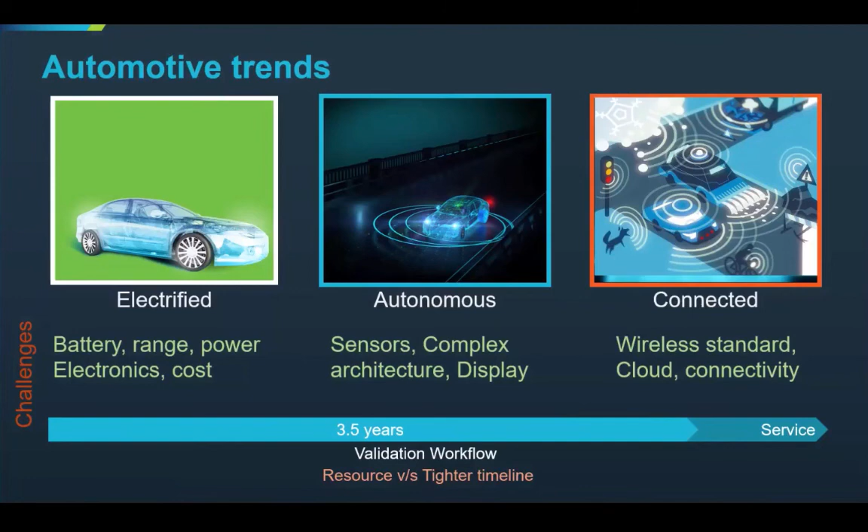So there are three main applications in the automotive world which all of us are probably dealing with. The first one is the electrified car. So in the electrified car, one of the biggest challenges teams are evaluating is how do we increase the efficiency of the battery: with a single charge, how long we can drive. The second one is the cost. How do we overall reduce the cost of the system so that the electrified car is affordable in the market and can compete with the current solution as well.

And in this area, the teams are working on evaluating various different components which will improve the power efficiency, reduce the battery size, as well as overall weight of the car. The second application is the autonomous car. This application is mainly motivated from the safety aspect. As all of us know, 95% of the car accidents are because of human error.

So we are evaluating that with the autonomous car, or a smart machine inside the car, which will either assist the driver or replace the human driver and make all those decisions related to your safety.

And that will make the driving much safer. And to achieve this functionality, or have a smart machine in the car, we need a combination of sensors. So sensors will provide a 360-degree view around the car, what are the objects around it, which will help making those decisions.

Along with those sensors, we will have a complex embedded controller, which is going to take all the sensors data and then make the smart decision, whether to apply the brake or change the lane. So all these smart decisions will be done by the smart machine inside the car.

Now, to achieve this functionality, as you can imagine, we are replacing a human driver with a smart machine. And to achieve that, it requires a very high speed controller, because in a matter of time we have to make those decisions. It is almost like replacing a brain with a machine.

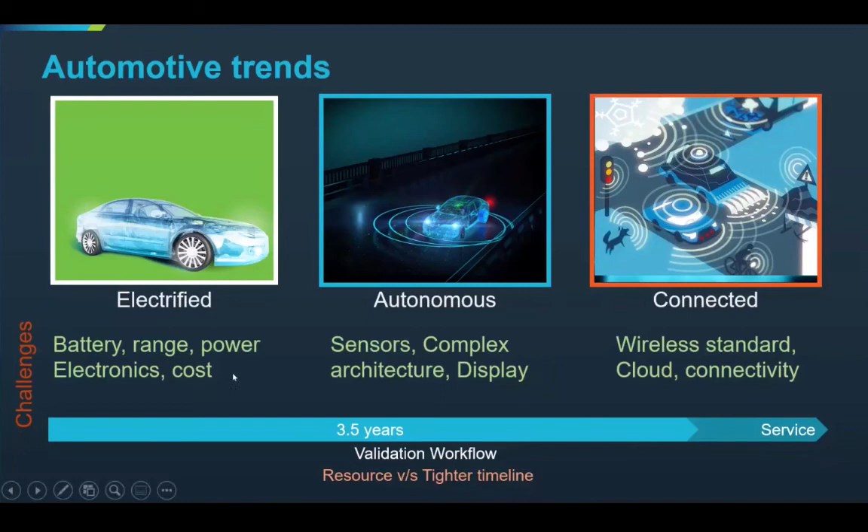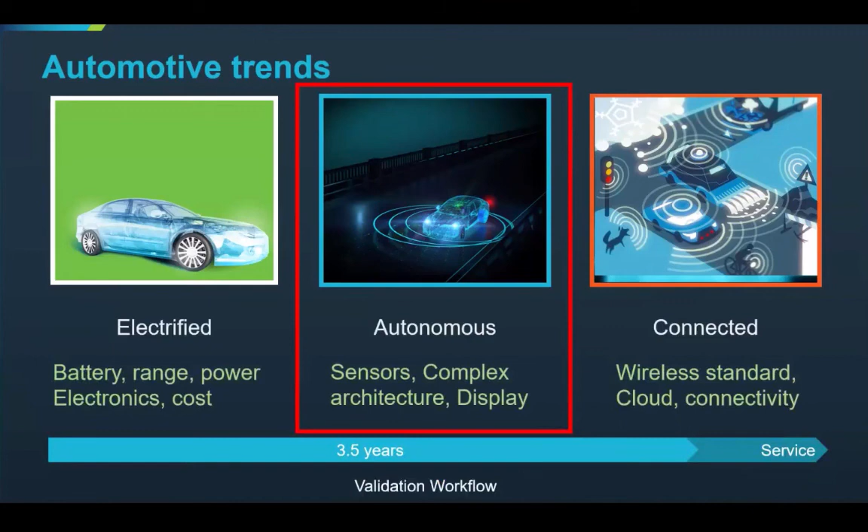In today's webinar, we are going to focus on the autonomous car. We will talk about what this autonomous car structure will look like, and what are the different standards which are evolving because of autonomous cars. So let's start with the basics. I'm sure you will be familiar with this slide.

What's the autonomous car? It is also called Advanced Driver Assistance System, in short ADAS. There are 5 levels of automation, level 1 to level 5, and depending on the level, the responsibility of the decision making will be transferred to the machine.

As you can see, in level 5, the entire decision making responsibility is with the machine. So there is no driver at all. The human driver is replaced completely by a machine. So all the critical decisions will be taken by this smart machine.

Now, as we move from level 1 to level 5, the machine becomes smarter and smarter, and we need a higher speed controller and more sensors to meet that complexity. For level 1 and level 2, we can have a simpler architecture, but as you move to level 3 to level 5, the architecture becomes more and more complex. And we'll talk about what complexity we may have as we go to level 3 to level 5.

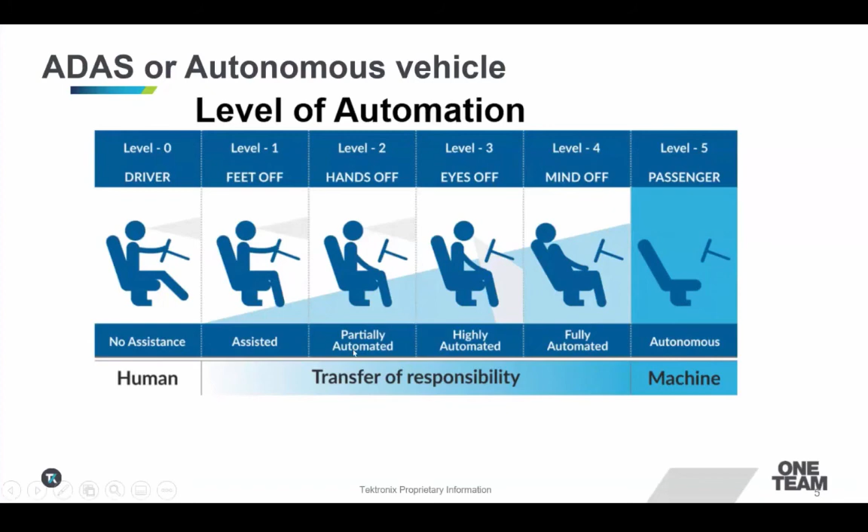So this is the architecture block diagram of the autonomous car. There are 3 main blocks in this architecture. There's a sensor block, which is automotive radar, camera, and LiDAR sensors. Then there is a controller and then actuator.

So the way it works is that there are three different kinds of sensors used: radar, camera, and LiDAR. And depending on which level of automation we are trying to achieve, the number of sensors will increase. Like level 5 may have 10 to 16 cameras, and a similar number of radar and LiDAR sensors. So all these sensors are looking at a 360-degree view and giving information to the controller about what objects are nearby.

You can imagine that any of the camera or radar sensors are operating at very high speed. And to transfer the data from the sensor to the controller, we obviously need high-speed in-vehicle network standards to send this raw data to the controller. The second one is a controller which is doing the data crunching and the decision making. So again, you can imagine that 16 camera sensors are sending data simultaneously to this controller, and then it has to make the decision in a very short time, like 4 microseconds or even less than that. So we need faster, complex embedded hardware to meet these requirements.

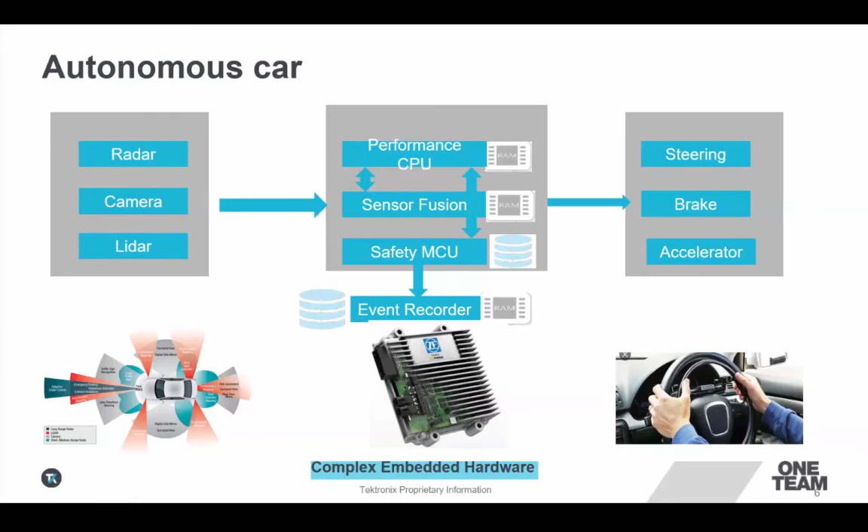So that architecture has its own advantages and disadvantages. The disadvantage is that all sensors are making their own independent decisions. They don't know the data from other sensors. So it is not a collective decision. It is an individual sensor's decision. For level 3 to level 5, that architecture may not work. So the other two architectures under consideration are central computing and the zone architecture.

The most popular one is the zone architecture, where we will have probably 3 or 4 different zones, and each zone will be doing data processing from its individual sensors, and then they would be talking to each other through a high-speed network standard to communicate what data they have received from sensors and what decision they should make. So there could be 3 to 4 different zones. This is also called a domain controller. This is one architecture which is very popular. There are a few OEMs who have already announced that they would be using a zonal or domain controller architecture.

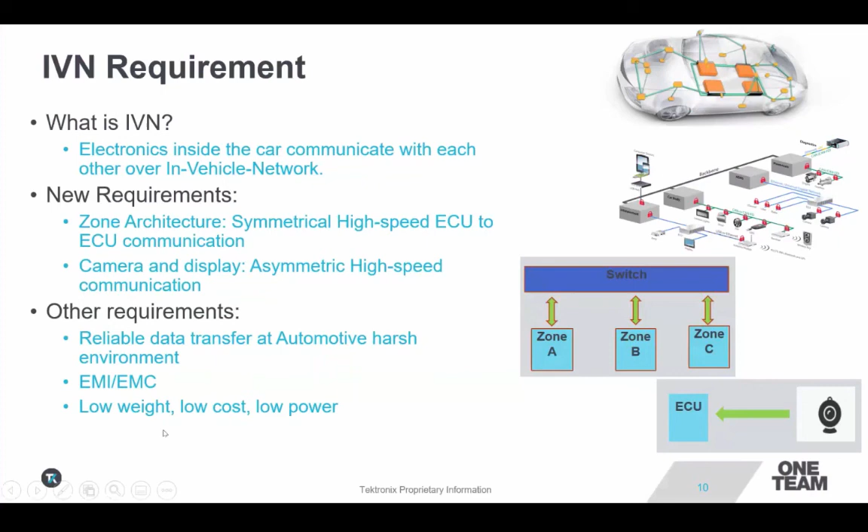Let's look at some of the new in-vehicle network standards which are evolving. I'll start with the symmetric in-vehicle network standard, where it offers full uplink and downlink speed. In that, Automotive Ethernet is one of the fastest growing standards. Currently IEEE is defining this particular specification along with Open Alliance. So we have already 100BASE-T1, which is 100 Mbps, 1 Gbps Automotive Ethernet standard, and multi-gigabit Ethernet, which is 10 Gbps.

This is the latest edition from the IEEE. It is an approved specification which was released by IEEE this year. So these are the three standards which are already approved from IEEE. And then IEEE is working on next generation 25 and 50 gig automotive Ethernet also for ECU to ECU communication.

In the asymmetric IVN standard, there are various LVDS standards available like FPD-Link, GMSL, and all of them are like proprietary standards. There are a few standards bodies also working on defining asymmetric IVN standards, like MIPI Alliance is working on MIPI A-PHY. There's a standard called HDBaseT, and the latest one is ASA. So these all standards are likely to be used for the display and the cameras as well. Even multi-gigabit Ethernet has a version where it can operate in a half duplex mode, which can be used also for the display and the camera.

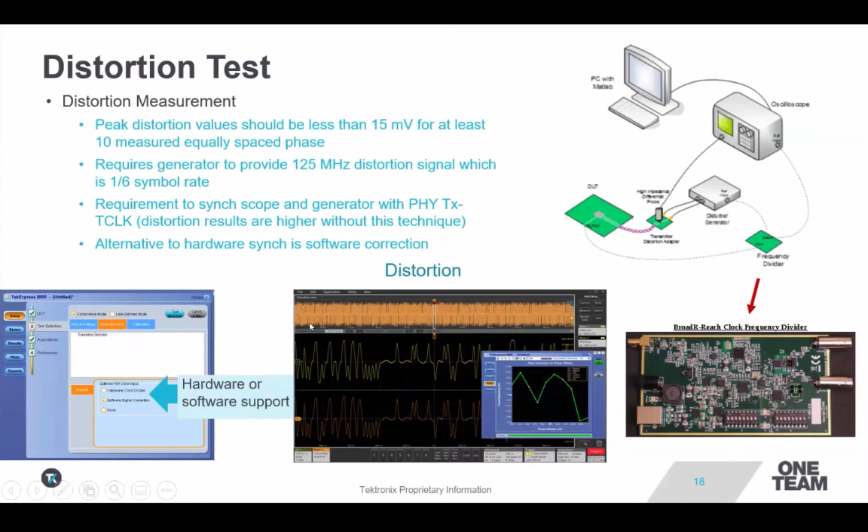The next three measurements we are going to talk about are more frequency domain measurements, where we need a spectrum analyzer or a vector network analyzer kind of instrument. But Tektronix offers these measurements using the oscilloscope itself. So the first measurement in that category is power spectral density, where we have to plot the RF spectrum to calculate the power spectral density. And we use the oscilloscope FFT method to perform this measurement.

Our oscilloscope offers the lowest noise floor with a 12-bit ADC, so that you can perform this measurement and get pretty much correlated results with the spectrum analyzer. We have done correlation with the spectrum analyzer, and it matches the performance of the spectrum analyzer. So we are able to perform the power spectral density measurement using the oscilloscope itself.

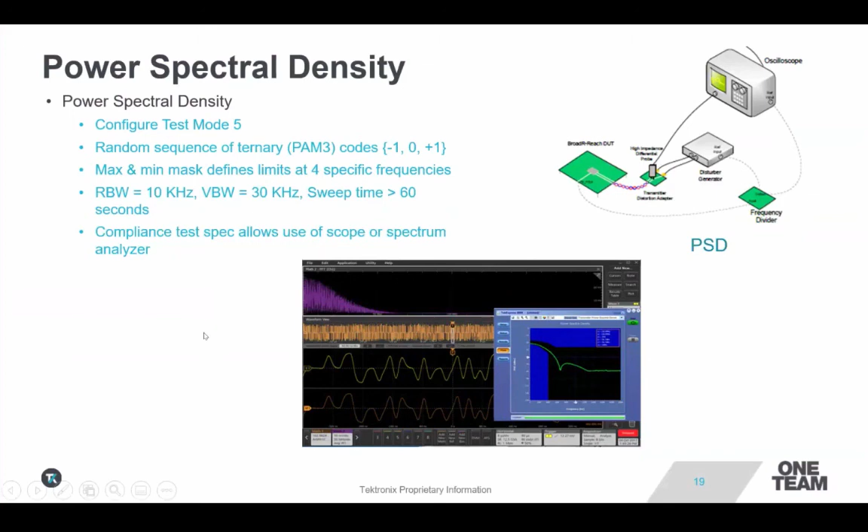The second measurement we have is the return loss measurement. Whenever you think of return loss, obviously the choice is a vector network analyzer. But Tektronix has a patented technique by which we perform even the return loss measurement using an oscilloscope and a function generator. And we have used this technique for traditional Ethernet for more than 10 years. We have done correlation with the network analyzer as well, so it correlates the result.

The reason this method is applicable for automotive Ethernet is that if you see the spec limits, they are not asking for minus 80 dB loss or those kinds of measurements. Those are in the range of minus 20 to minus 30. That's the reason even the oscilloscope-based method is able to measure this return loss for automotive Ethernet. And our performance is very similar to a vector network analyzer. Here the advantage for you is that a single instrument can be used for the time domain measurements as well as some of the frequency domain measurements.

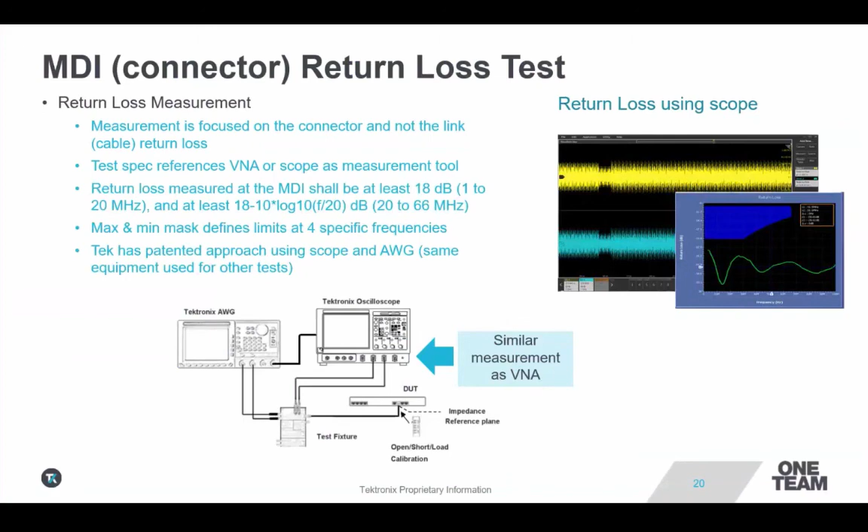Another measurement we have is the common mode emission test. Again, as per the Open Alliance procedure, you can use either an oscilloscope or a spectrum analyzer for this measurement. We use the oscilloscope method to perform this common mode emission test. This specification has a very tight margin, like 25 microvolts up to 75 megahertz, and it is very sensitive to noise from nearby instruments, a monitor, or even a mobile. But we are able to perform this measurement using the oscilloscope and accurately measure the common mode emission.

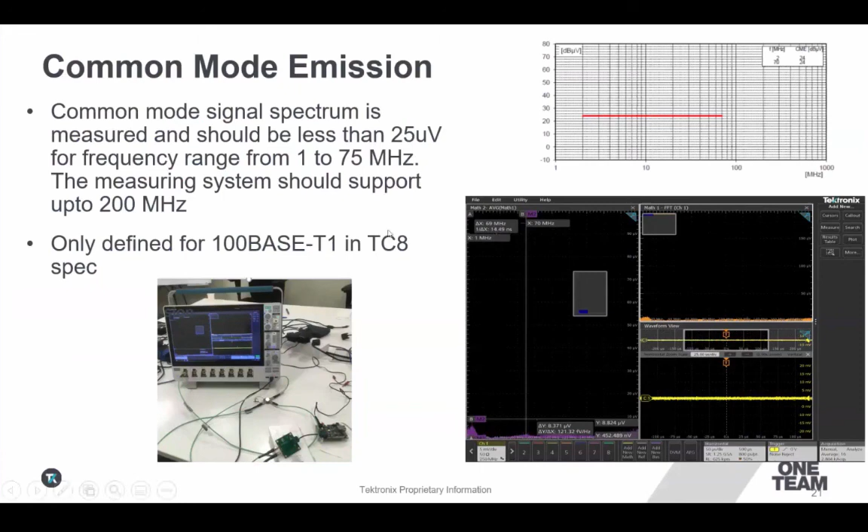So these are the three measurements where it is a frequency domain measurement, but we are still using an oscilloscope to perform it. Let's look at the solution. So what solution do we have? There are three different aspects of the solution. The first one starts with the fixture, the second one is a probe, and the third one is the oscilloscope along with

the automation software. We have TekExpress-based automation software by which we can automate all the measurements for automotive Ethernet and perform compliance for 10BASE-T1S, 100BASE-T1, as well as 1000BASE-T1. This solution is supported on the 5 and 6 Series MSO, which are the latest oscilloscopes, as well as performance oscilloscopes like the DX and SX series platforms.

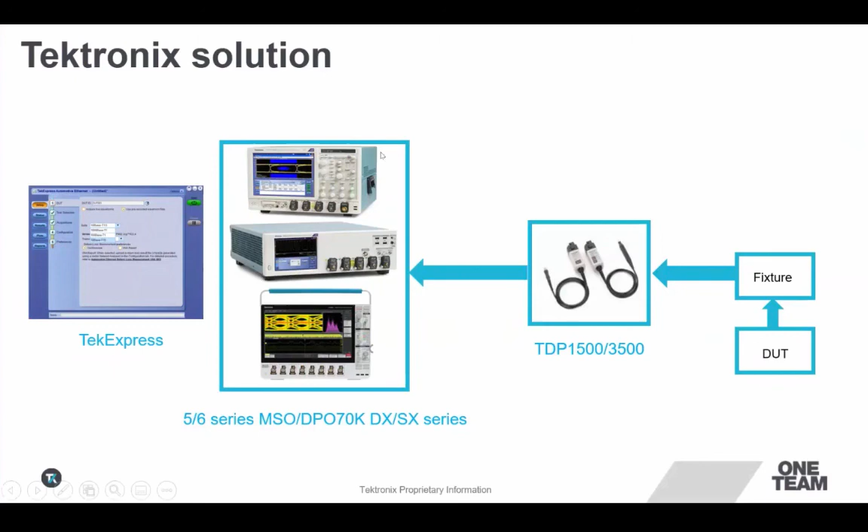So let's talk more about the TekExpress based solution. So it's a wizard based solution. Here the biggest advantage is that you don't have to read the documents from IEEE or from the Open Alliance. This configures the entire test based on the automation platform.

So in a single TekExpress software, we have 10BASE-T1S, 100BASE-T1, as well as 1000BASE-T1. Once you select the specific test suite, you can configure the test selection. So we have all the tests as per the Open Alliance as well as IEEE specification. This application can run either in the compliance mode or the user-defined mode.

So in the compliance mode, it configures the parameters of the oscilloscope or a function generator completely as per the Open Alliance procedure definition. In the user-defined mode, as an advanced user, you can change most of the parameters to perform the test beyond compliance.

One of the biggest advantages you get with this solution is that every time you run this measurement, the waveform, the oscilloscope setting, as well as the report, everything is saved into the hard drive as a session file. So in case you find a failure, you can recall those session files, which will include the waveform, and you can perform the debug. We offer DPOJET debug tools as well to perform root cause analysis of why certain tests failed. You can share this session file with your counterpart team to run this in an offline mode and perform the analysis of why something failed.

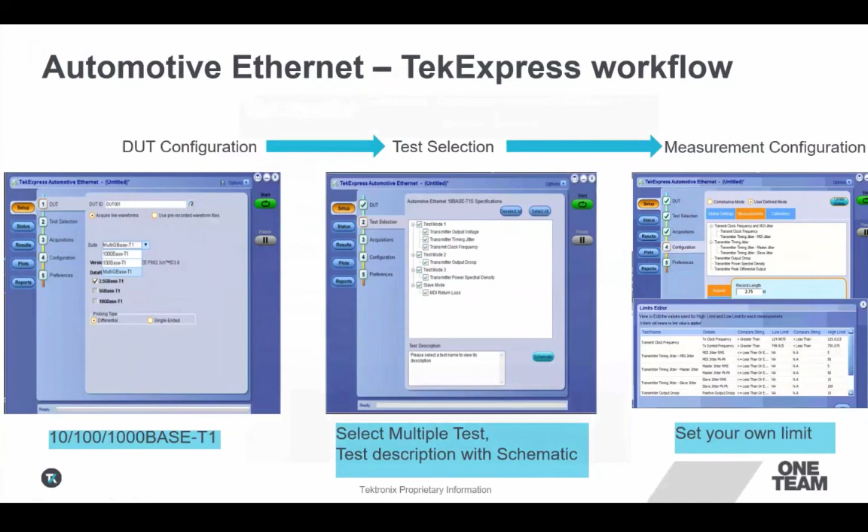Once the measurement is completed, it gives you a nice report along with the pass-fail criteria, whether the test is within the limit. It also gives you a screenshot of how this measurement was performed and what region of the waveform this measurement was performed on. So all these parameters will be available, which can be shared with your counterpart team.

So let's move to the next one, which is the eye diagram test. We mentioned the system level test requirements, that we need to perform a noise test: when you integrate two ECUs, how these two ECUs are communicating with each other, and if you add noise, is there a performance deterioration? So to perform this measurement, first thing is, why do we need an eye diagram test? Is it defined in the Open Alliance or IEEE? Yes, the noise test is defined in the Open Alliance, that you need to add noise and perform the signal quality test at the receiver.

And as you have seen in many of the high-speed standards, like PCI Express or USB, one of the critical measurements is the eye diagram, because the eye diagram gives you the overall health of the link, how this link is performing in various conditions, like noise, a change in temperature, or a change in voltage. The eye diagram gives you a good view of the overall link.

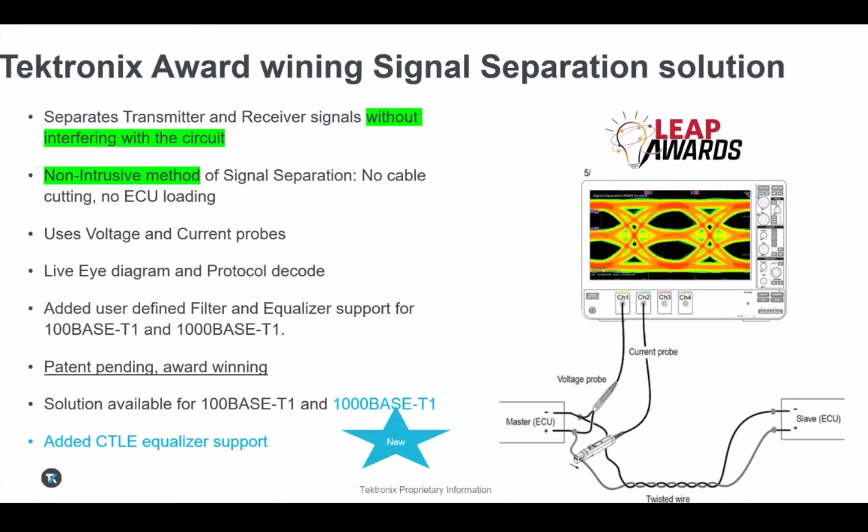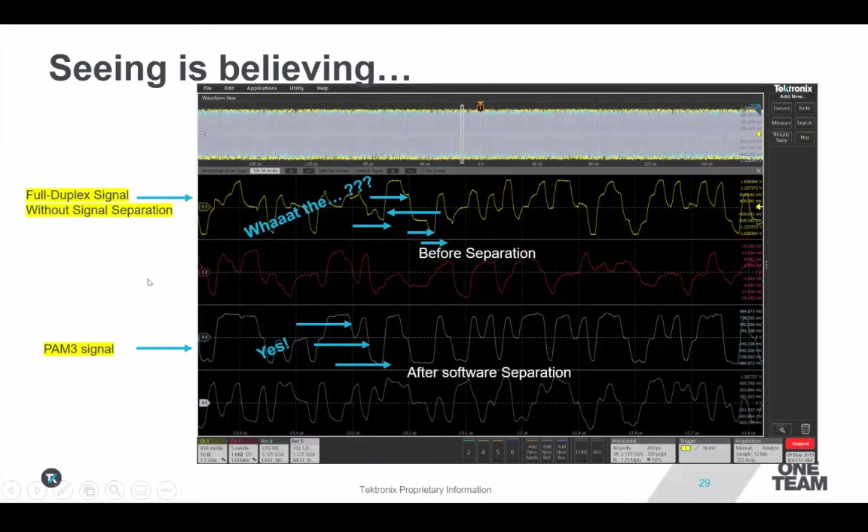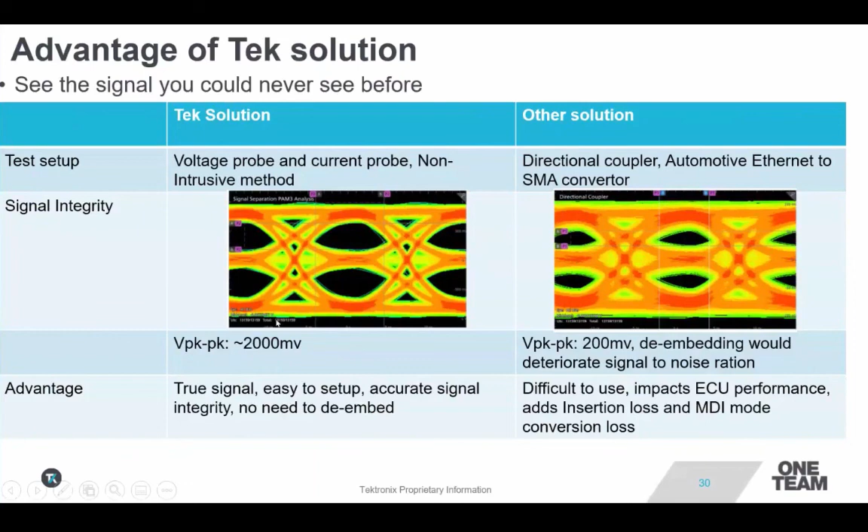And the most important, it is very easy to set up. You don't have to cut any cable, or you don't have to add new hardware in between to perform this signal separation. And this waveform can be used for doing signal integrity analysis as well as protocol decode.

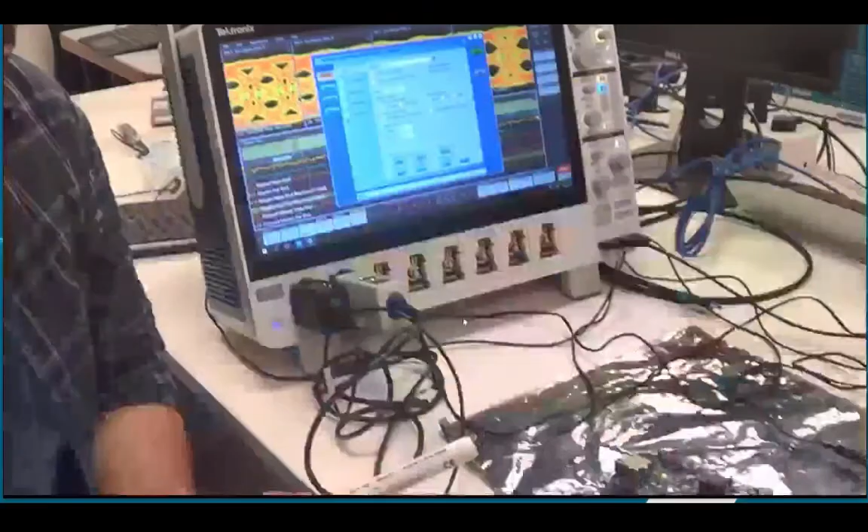Let's look at a short demo of this feature. I'm going to do a voiceover. I've just recorded this video showing a live demo of this one. So we have the two Marvell DUTs here, which are configured as a full duplex signal.

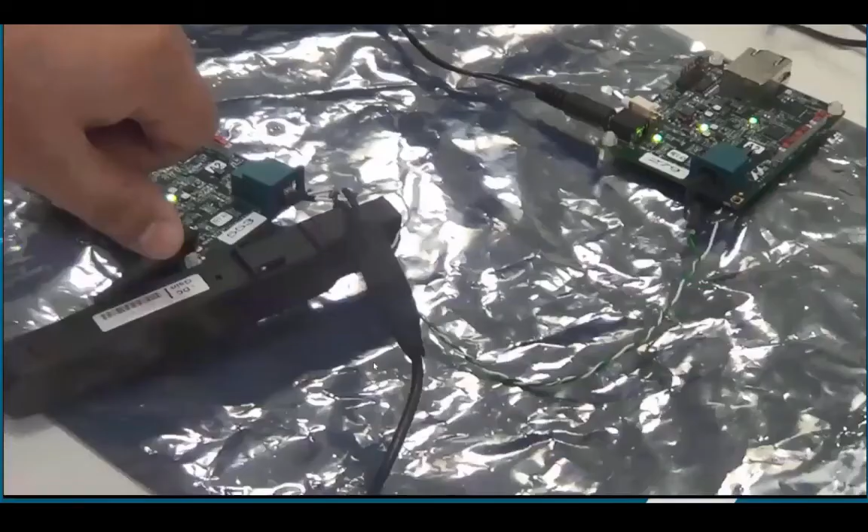One of them is acting as a master, another one is configured as a slave. And then we have connected a twisted pair of cable between them, a short cable for this. Obviously, we can use the same demonstration for the longer cable as well, and it works. And we have connected the TCP0030 current probe and TDP1500 voltage probe, one as a differential signal and one as single-ended. And the direction of the current is from the positive side, from master to the slave. That's how we have connected, and we have connected the voltage probe also differentially.

So now let's look at the application. So we have this TekExpress application again for the signal separation. It can be done as a 100BASE-T1 or 1000BASE-T1. In this demonstration, we will add an equalizer also to show you how it removes the ringing effect. So we have a 3-tap CTLE filter and created that filter. And now we are going to press validate to perform the signal separation.

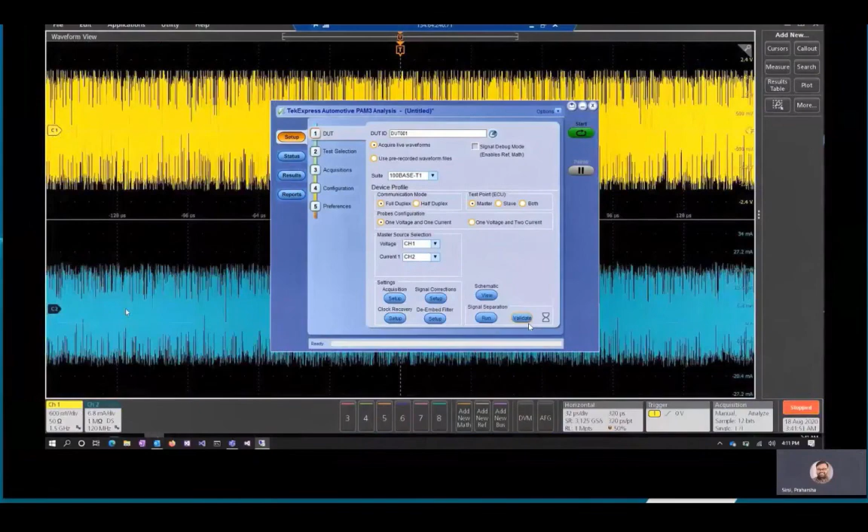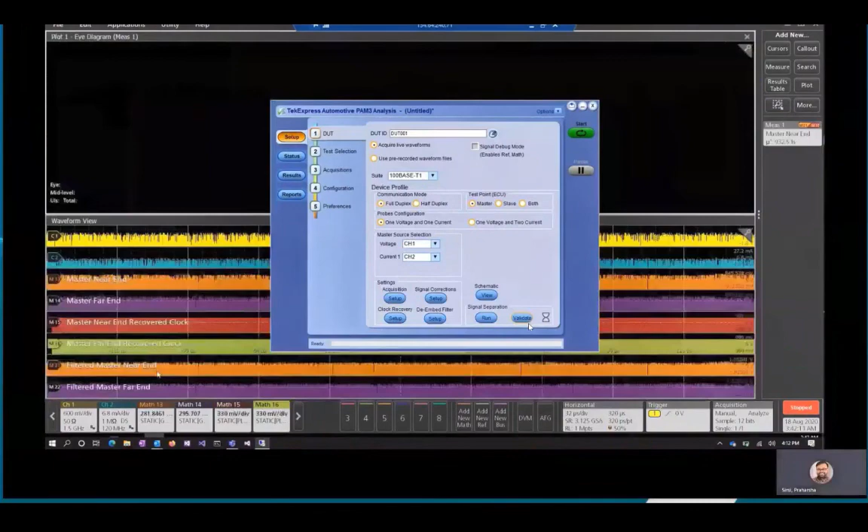So now it will acquire live waveform. On channel 1 we have the voltage waveform, and on channel 2 we have the current waveform. So it will acquire both waveforms and now perform a signal separation on this. So again, we are using a patented technique to separate the transmitter and the receiver signal. It is applying the filter as well, and then doing a clock recovery. And based on these waveforms, it will plot an eye diagram for both transmitter as well as the receiver.

So here the left hand side is the transmitter, and the right hand side is the receiver eye diagram. So you can see some ringing effect on the other eye diagram, just to show you the difference before equalizer and after equalizer. So let me pull in the waveform without filter so that we have the comparison of both. So this is the eye diagram before applying the CTLE filter, and we'll do it for the near end as well. So this shows how easily we can capture the signal using this setup and then perform the signal separation as well as eye diagram.

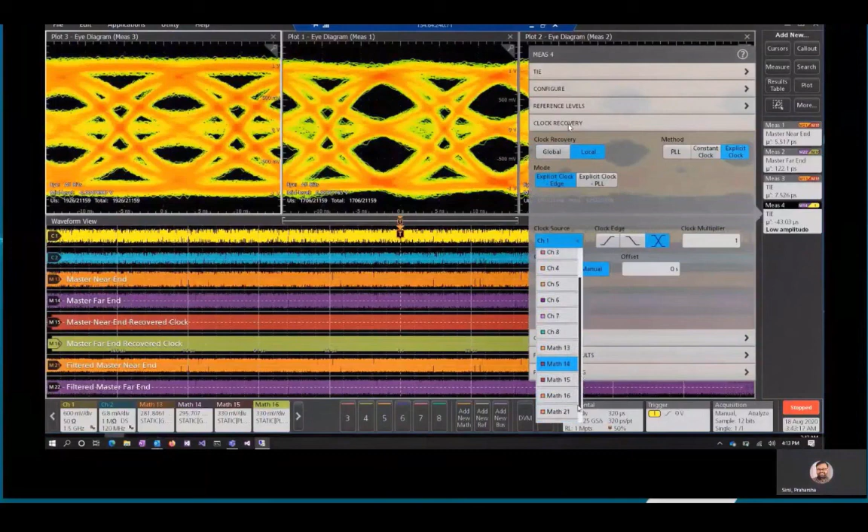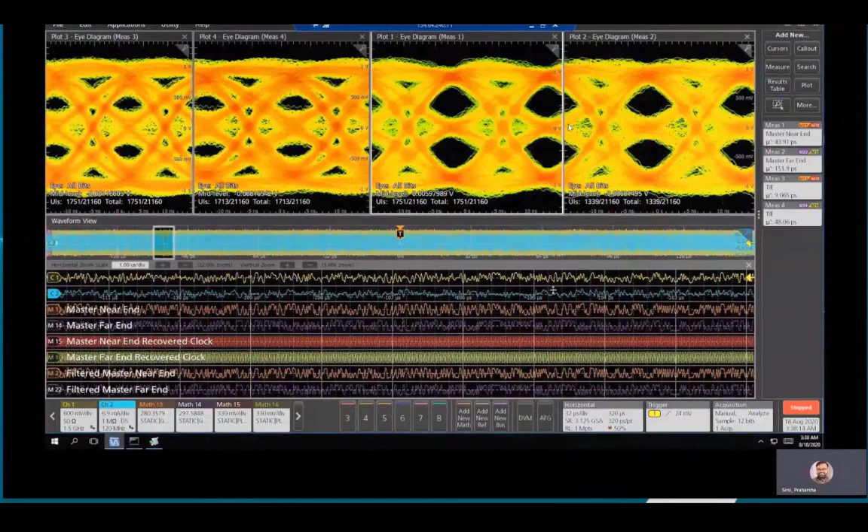This eye diagram can be used to see, if you add noise, how the eye diagram looks. It calculates the bit error rate as well, with the given eye diagram, what could be the bit error rate at the receiver end. So you can extrapolate this information to look at what could be the bit error rate. This eye diagram can run in a continuous mode as well. So you can run continuously now, and it will keep acquiring the waveform and plot an eye diagram. And for every eye diagram, it will give you the bit error rate. So you can see it runs in the live mode also and keeps capturing the eye diagram. So that was a quick demo of the signal separation technique.

Now let's move to the other use case, which is the timing measurement. So as we are moving to the automotive Ethernet world, we will have gateways, and the gateways are basically communicating with the existing low speed CAN FD network and converting into automotive Ethernet. So one of the test requirements is the latency: when you send data from CAN, how much time it takes to reach the final node. So that's a latency measurement.

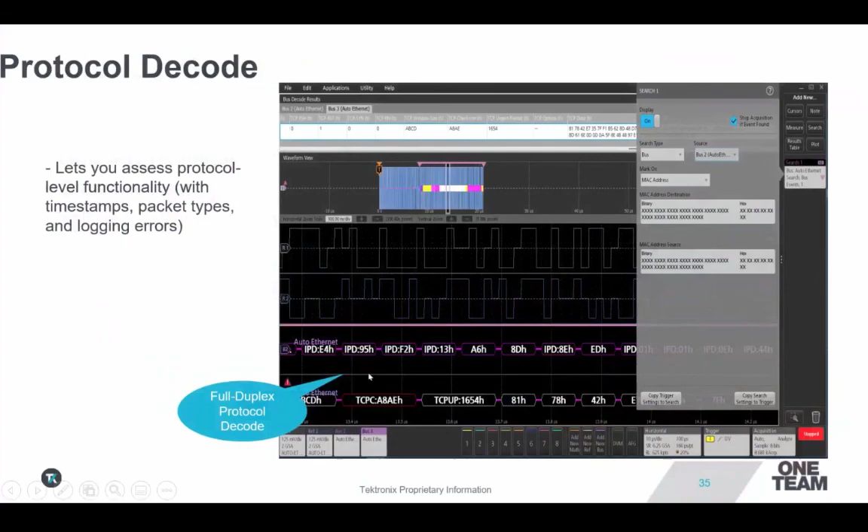The other one could be that for automotive Ethernet, we have the MII interface, or media independent interface, which converts the MCU data into automotive Ethernet. So what's the latency of MII to automotive Ethernet? For such measurement also we can use this signal separation technique. So in the demonstration, we've used an Intrepid CS box as a gateway, and we are simulating a scenario where we are sending CAN traffic on one node, then it is converted into automotive Ethernet, and we are calculating the overall latency of that. So again, we are using the signal separation technique to perform this demonstration. So let's look at a quick demo of that as well.

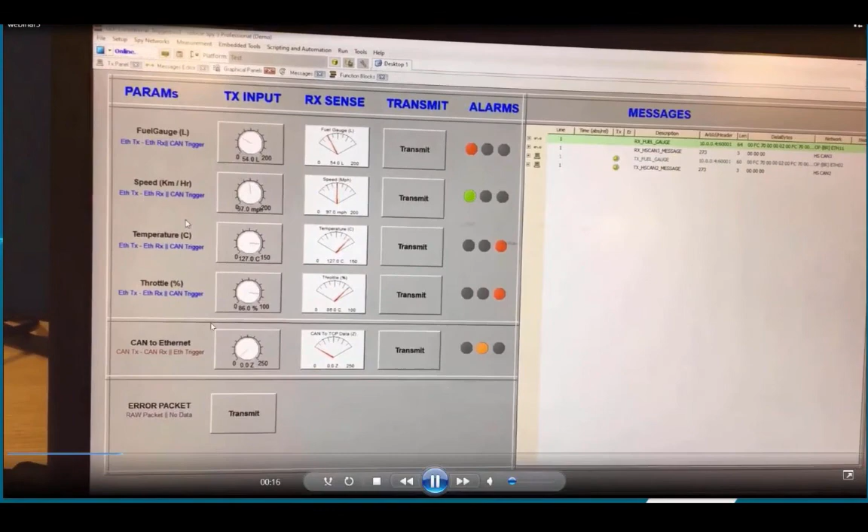So here we have the RAD-Galaxy box, and this is the Vehicle Spy UI. In that we have programmed multiple CAN sensors like speed sensors and temperature sensors, and then we are using a functionality of Vehicle Spy which converts CAN to Ethernet, or CAN to TCP.

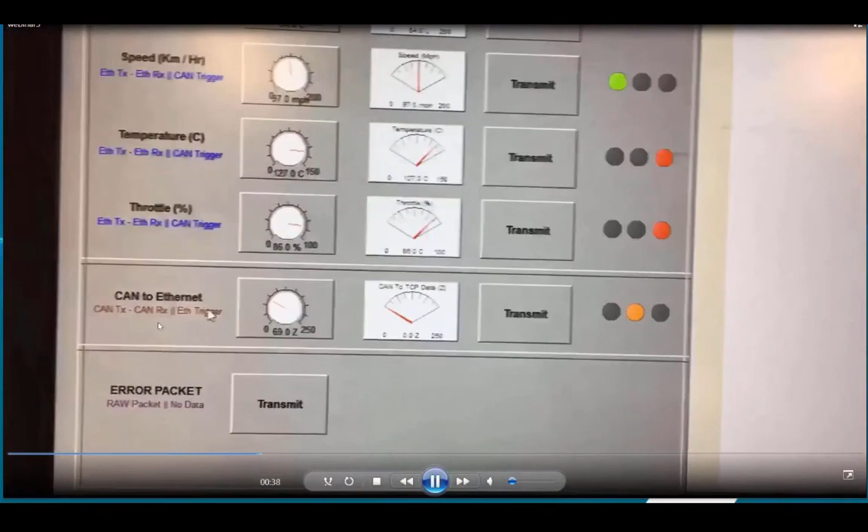So that's the functionality we are using to show this demonstration. So when you say transmit, it is going to send this CAN traffic into the automotive Ethernet. So once you click on that, we are sending a data called 70 from the speed sensor onto the automotive Ethernet. So we have sent the data, and as you can see, we have sent 70 here as a data from CAN to automotive Ethernet.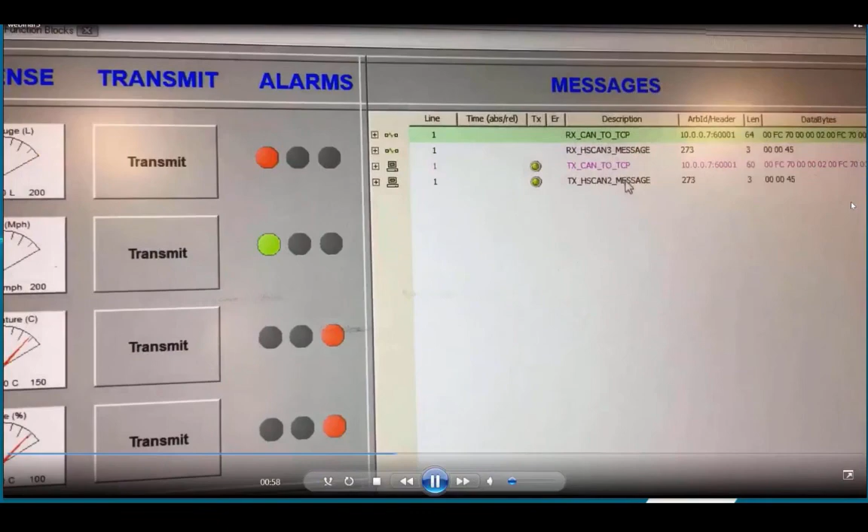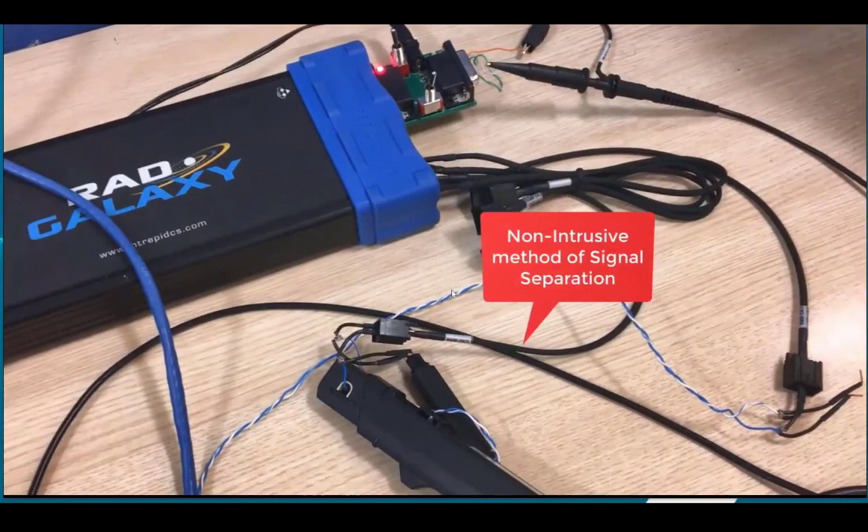If you see the hardware connection, we are using this RAD Galaxy box, and on one side we have connected on the CAN port to sense the CAN traffic. And then with respect to the CAN, we are probing on the automotive Ethernet as well. As you can see here, again, we are using a combination of voltage probe and a current probe to sense the automotive Ethernet traffic as well. So we're using this non-intrusive method of signal separation.

Now let's look at the oscilloscope. So we are triggering on CAN bus, and then performing a timing measurement from CAN to automotive Ethernet, how much time it takes. So it has calculated 179.2 microseconds. So as you can see, here is the CAN traffic, and the top one is the automotive Ethernet.

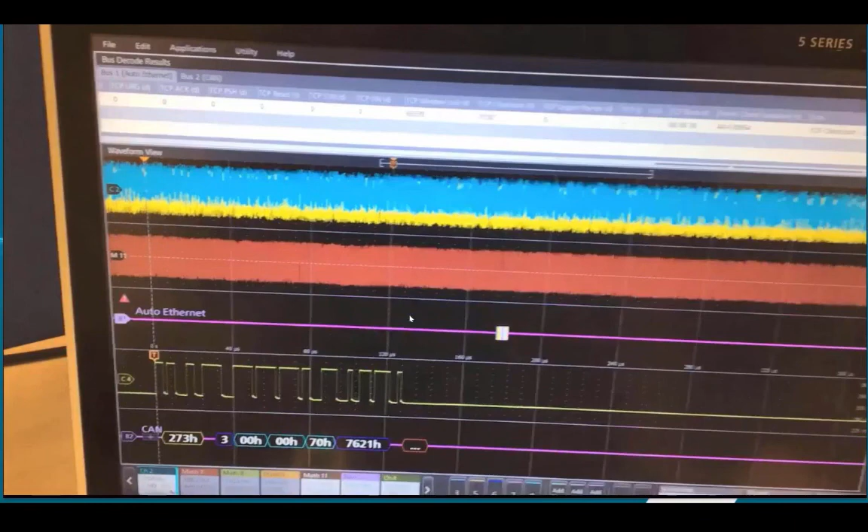So with this technique, we can do precise timing measurements without cutting any cables and without compromising on the performance of the ECU, and perform the protocol decode for both automotive Ethernet and the other standards as well.

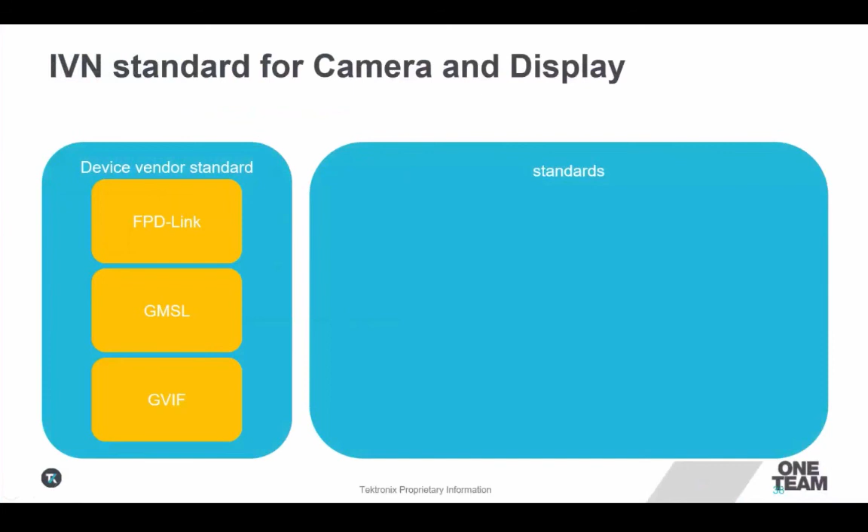Okay, so now let's move to the next section, which is the IVN standards for the camera and display. So there are two kinds of standards which exist today. One is called a device vendor or proprietary standard, which is FPD-Link, GMSL, GVIF. And as I mentioned, there are multiple standards which are working on this one called MIPI A-PHY, ASA, HDBaseT, multi-gigabit Ethernet, as well as the Japan-based JASPAR standard. All these standards are also working on standardizing these interfaces.

This standardization is still in progress, so we don't have real silicon available today for most of these standards. There are a few which are available, but most of them are not yet available in the market. So in this presentation, we are going to talk about the proprietary standards like FPD-Link or GMSL. So if you have those interfaces, one of the biggest challenges is that there is no consortium or no compliance standard, right? So how do you measure it? Is there a test procedure available? And is there documentation available to perform measurement for some of these proprietary standards?

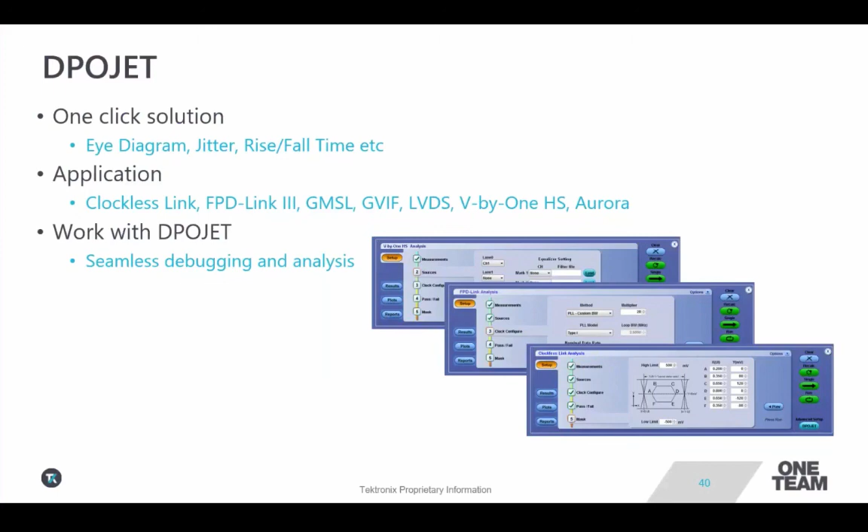So Tektronix has come up with a very unique way of solving this problem, with two ways to perform this measurement. One is DPOJET, which is the eye diagram and jitter test tool. So based on this DPOJET tool, we have already developed some of the basic measurements for these standards like FPD-Link, GMSL, and GVIF. And we have the standard setup files available to perform those measurements. We work very closely with most of these silicon providers, and developed this setup file-based solution.

The second one is the TekExpress based solution called LVDS Express, and this is a completely user-defined test solution. There are already quite a few tests available for the LVDS standard, and the biggest advantage of this one is that all these test limits are user configurable. So if you have the test limits available for any of the standards, you can program the test limit and perform the transmitter analysis for some of these proprietary standards as well.

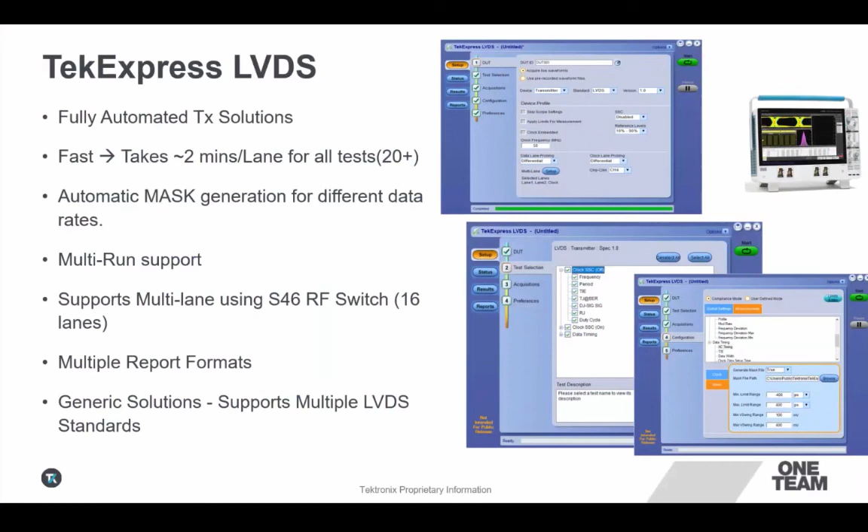So, this is the last slide, the summary: we offer a complete transmitter test solution from 10 Mbps, like 10BASE-T1S, all the way up to 1 Gbps automotive Ethernet, and not just the compliance solution, but also LVDS transmitter validation solutions for FPD-Link and other proprietary LVDS standards.

And beyond compliance, component test is not the only test you would be performing. We have to worry about the system performance, like if you add noise, how the eye diagram would look. So we offer a solution beyond compliance for system level testing also. And we offer various debug tools like DPOJET, PAM3 analysis or PAM4 analysis, signal separation, protocol decode, to perform not just pass/fail tests, but if something failed, find what could be the possible root cause of that.

So if, let's say, the signal quality test is failed and you want to see an eye diagram, we have the signal separation solution which will give you an eye diagram, and you can plot the various different measurements as well. So we are beyond compliance offering the solution.

With respect to the consortium participation, we are active members in most of the consortiums we mentioned. We drive the test specification. Tektronix is leading the Open Alliance multi-gigabit Ethernet PMA test specification development. So we are active contributors in many of the consortiums to drive the test requirements.

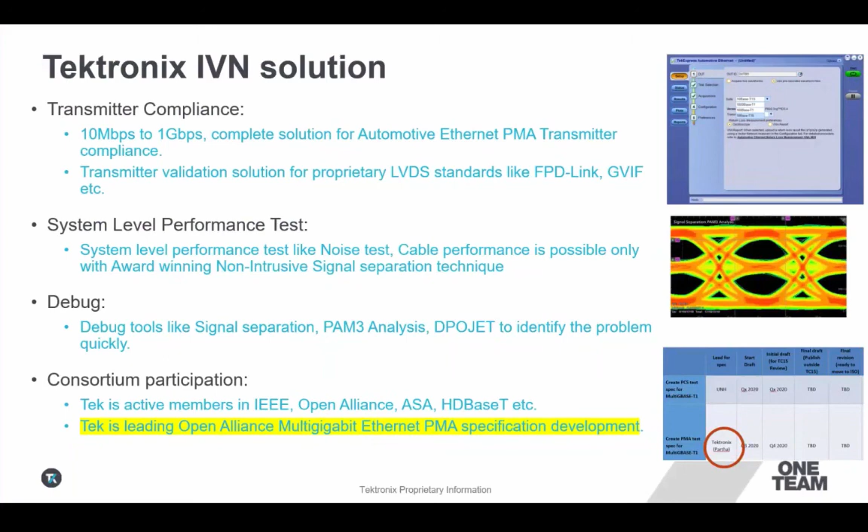And last but not the least, we just announced the new oscilloscope in the MSO6 series just yesterday. So this offers a 10 gigahertz analog bandwidth along with up to 8 analog channels. So it offers the lowest noise floor along with the high 50 gigasample of sampling rate.

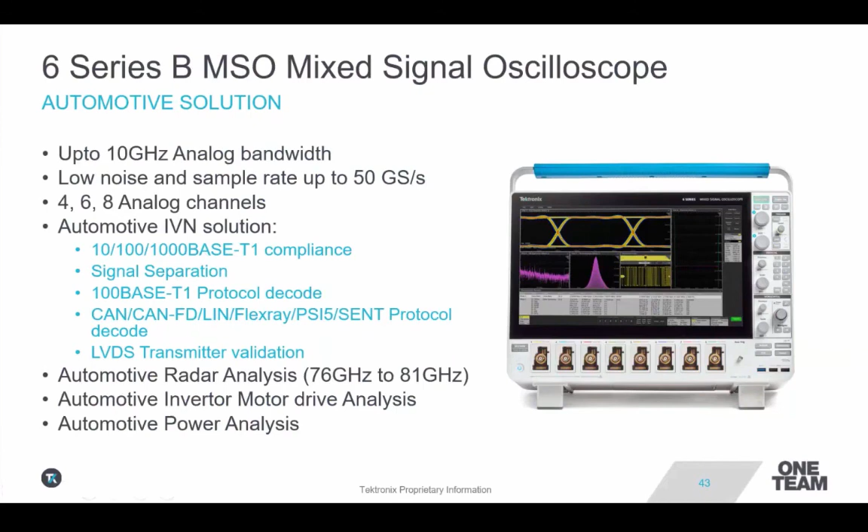And with respect to the automotive solution, this one box can be used for multiple applications. So we already spoke about some of the applications on the in-vehicle network standard, but apart from that, the same box can be used for automotive radar analysis, as well as inverter motor drive analysis and the power analysis solution. So we want to make sure that you can use the same capital investment for multiple applications.